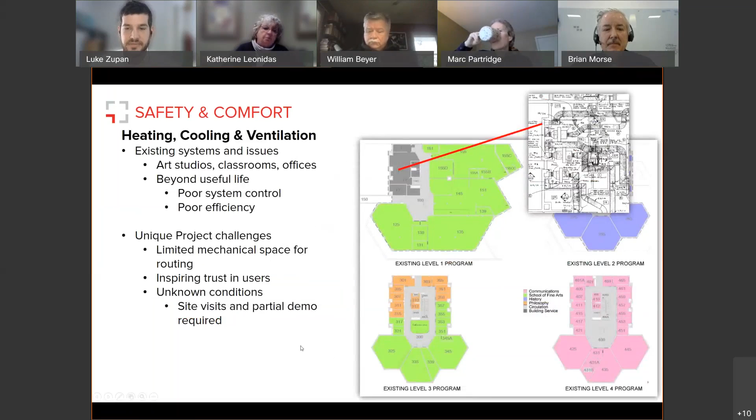What's really important in design, in my mind, is the approach. That being said, we have a pre-design and we've all had access to that. That's a snapshot in time. Many of those elements are very relevant and good ideas for this building.

That being said, there's no way we can do a complete design without the owner's input. So that'll be step one in our process: really understanding what the occupants' needs are, whether that be the art space or the classroom spaces. What's the experience of the UMD staff? The institutional knowledge we've gained from previous projects and previous work will be paramount.

Next, we have our CM at risk. We'll leverage that as a tool to really understand cost implications, constructability, means and methods, as well as market forces that we're all living through right now in the construction world.

I want to explain very briefly a couple of these images. We have a steam to hot water heat exchanger. This is something that will definitely be part of this project. We've just worked through the design of one of these with John Sawyer on campus, so we have that experience. It's in our back pocket.

Above that, we have a VAV system. This is a likely candidate for this project. It provides zone control, and access to the building automation system to create good sequencing and good efficiency. Alternatively, we have a chilled beam design here, which is just one tool we could look into to provide smaller duct chases. We look forward to exploring these options.

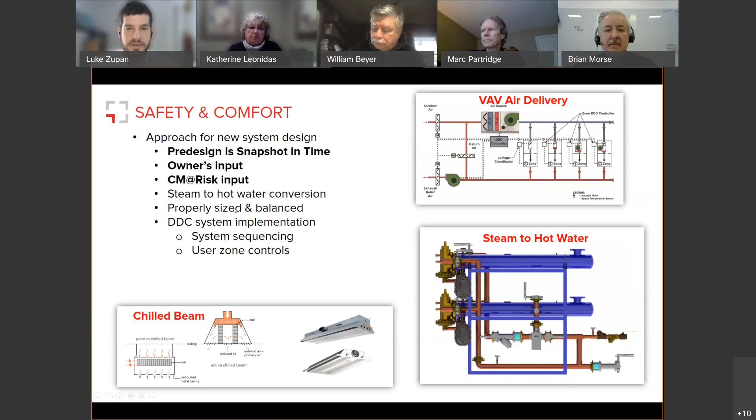I just have a couple of minutes. I wanted to point out this is really the extent of the fire protection in Anderson Hall. And obviously, at the end of our project, we'll use our specialist, Brian Kelly, to develop an active and passive system that is extensive to Anderson Hall.

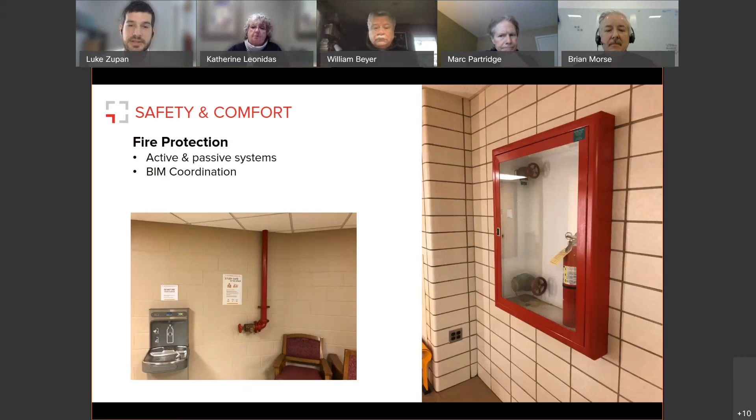And the way we can do this effectively is through BIM coordination, like all other elements, whether it's piping, ductwork, or fire protection, that's strictly coordinated through our building model to create something that's constructible and efficiently designed. Next slide, please.

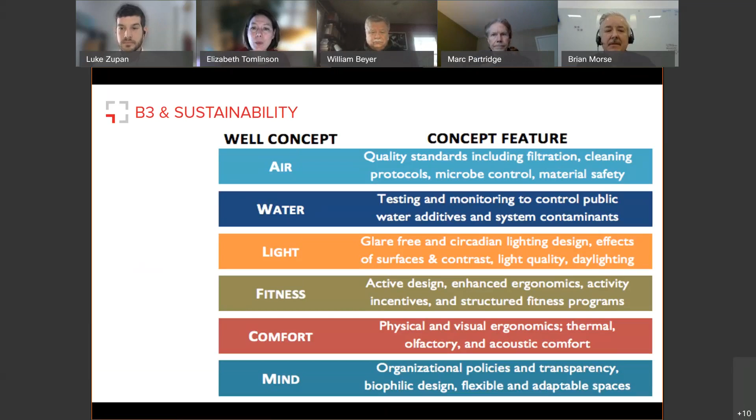Next slide. So I had presented in our proposal a preliminary assessment of what B3's SB 2030 expectations for this facility would be. Again, being grandfathered in for our pre-design start date, we will be expected to meet 40% better than a typical building, which is pretty great for this facility.

I know the windows have already been replaced, so that's a great step forward. But with the mechanical and electrical upgrades, we're going to be able to pick really efficient systems and hopefully get to this target of 83 EUI, the energy use intensity. If you're not familiar with that, it's like the miles per gallon of a car — a metric to compare buildings against each other over time or to other buildings.

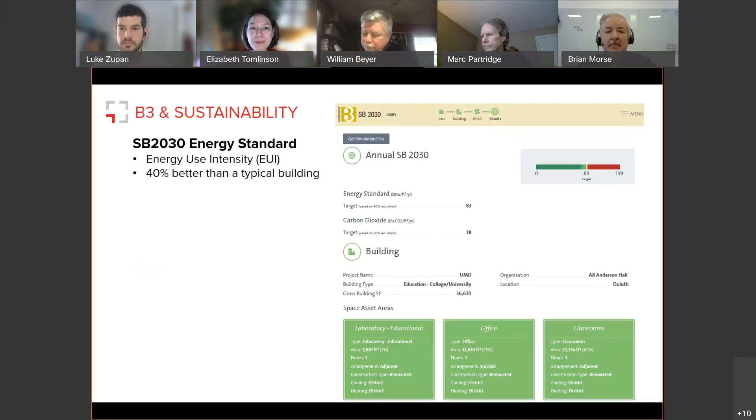Next slide please. So here's an example of what we tend to put together for our projects. Energy modeling, a whole energy model, is paramount for a project. You have components that you try to include within a sustainable project, and they counteract and work with each other. So creating whole building energy modeling incorporates all of the components, whether as an iterative process to assess individual alternatives for replacements of one system or one envelope component, or the whole package together.

This is the kind of output that will generate so the owner can have information to make an informed decision. Along with these presentations of the impact of choices, we provide life cycle cost assessments. That includes not just the short-term costs and energy impact, but also the long-term maintenance and long-term cost of replacement of equipment. So it really gives the owner a full understanding of the selections we're presenting and making informed decisions.

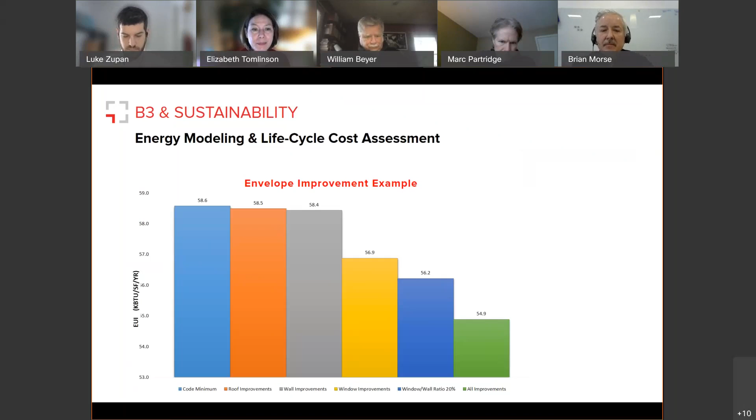Next slide. So here's an example of a tool that has been recommended — it's the talk of the town. It's an image of bipolar ionization. Basically, it's just one tool for air quality. You can provide a lot of different options that provide flexibility within an HVAC system.

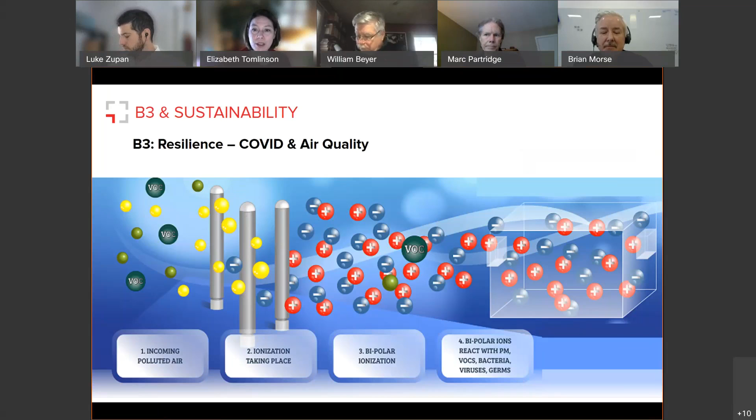I put this up here to just have a talking point on resilience. Resilience is just planning for adverse events, whether it's a pandemic, high allergy or pollen counts, or smoke. Really, resilience at TKDA means talking with the client about what risks they anticipate or could anticipate, and letting the engineers solve the issues. You're in good hands. I know this slide looks a little doom and gloom, but the gist is there are issues out there, and we want to help identify them ahead of time so we're making smart investments and your facility is flexible for whatever may come, so you're well prepared.

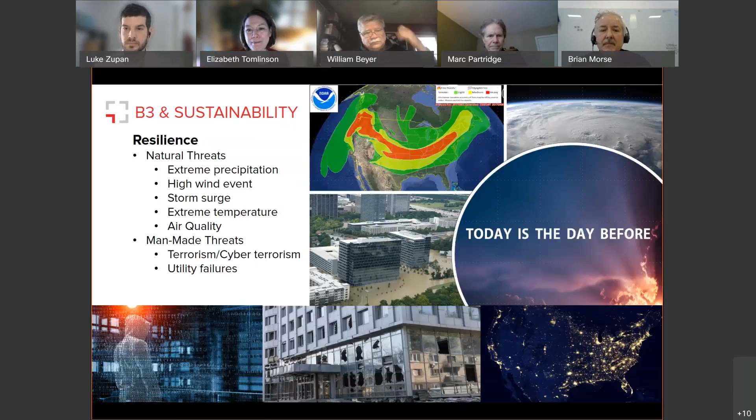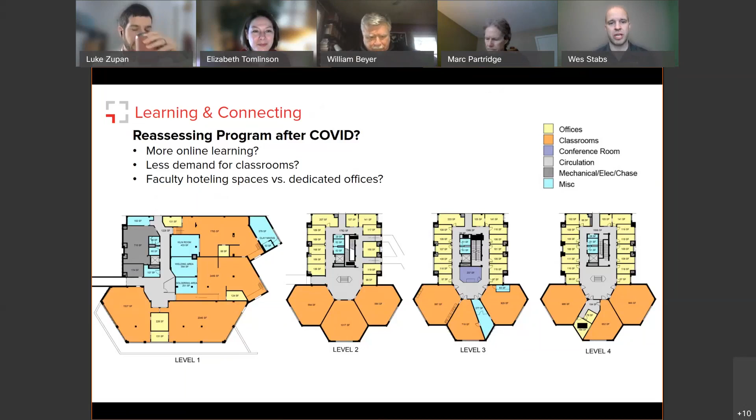University insights to these questions could equate to physical space that is freed up for other uses. I want to quickly take you through the architectural needs as outlined in the pre-design and university wishes.

We'll be supporting mechanical and electrical by developing a mechanical penthouse enclosure, rated mechanical shafts for ductwork that pokes through the floor, and architectural finishes to cover up the ductwork in the end. There's also accessibility issues that we have to think about as we go through the project.

And the university has stressed the idea of enhancing the building entrance. Currently there is not a clear entry facade, although there is an entry on level 2, but that is not in the budget currently, so it is something we'll have to look at and work with them.

Another thing we've identified is that the facility currently lacks adequate restroom space. There are 2 present on the first floor, but realistically the building should have 8 toilets per sex. Right now the restrooms are allowed to be shared with the Humanities Building, and in the past that was okay, but as we work with university code officials and the university, it'll be something we want to look at.

This diagram gives you an idea of the type of toilet room spaces we'd be looking at, and we would probably need about 150 to 175% of that area. So something would ultimately have to give program-wise.

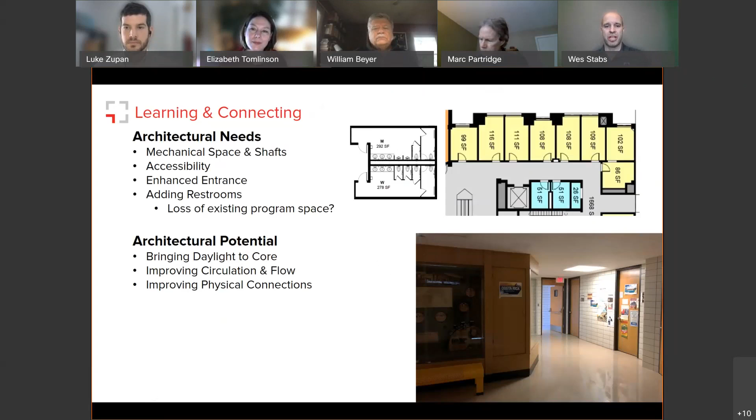But the project has a potential to provide more than that. We have the ability to strengthen student communities, and I want to take you through some of the architectural potentials we think we can bring into the project, including bringing daylight into the core space of the building, improving circulation and flow, and improving physical connection. Next slide, please.

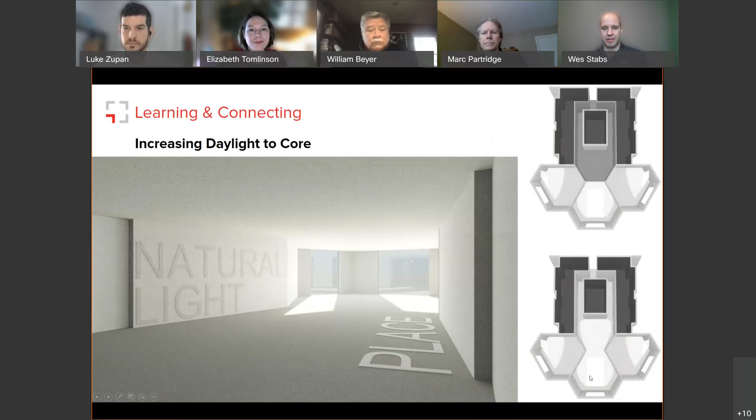Increasing daylight to the core by making simple, economical removals, we can get much needed natural light into that core space. Next slide, please.

Taking that idea a little further, if the program can give up a classroom, for instance, a student queuing space or sticky space can provide soft seating, reduce traffic congestion, and improve circulation and flow for the building floor.

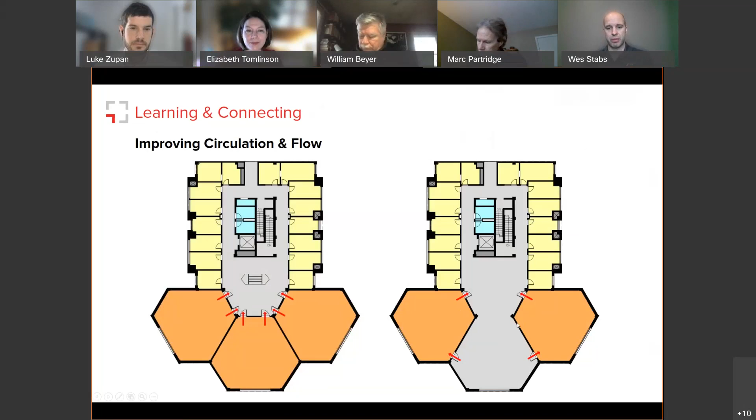Again, by removing a wall, this sticky space could also be an area where we could present student artwork on the wall from the fine arts program below. Next slide, please.

And then improving connection. The second floor of Kathryn A. Martin Library was closed off by book stacks, compartmentalized offices, and underutilized storage and IT spaces. In a project within the past 4 or 5 years, we were able to work with the university to remove these barriers and open up the space to allow transparency.

The new student-centric program reinforces gathering and collaboration, not so dissimilar from what A.B. Anderson's queuing space could become. Next slide, please. With that, I'm going to turn it back over to Brian.

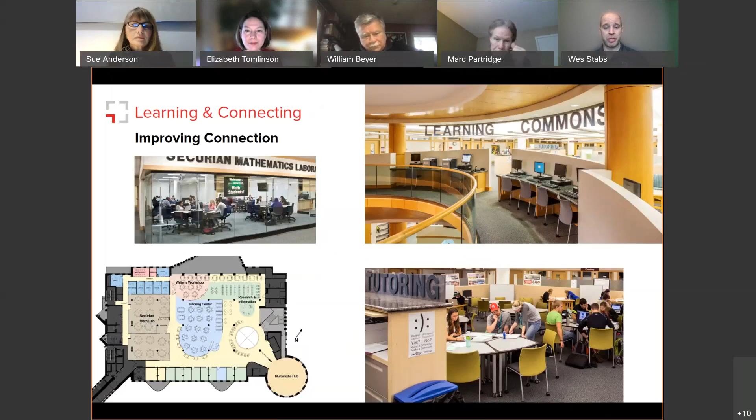Well, I would like to hit quickly on a couple of observations, and that is, the pre-design, as we've mentioned, really was a snapshot in time. There's the RFP scope, as we've heard, and there's some additional scope that was discussed during some walkthroughs. I guess the takeaway is it's going to be real important that we understand what the scope is as we leave schematic design.

There's the code required issues, and there's the wish list. I would put the generator onto the latter, and I'd like to talk about that a bit if anyone wants to ask me a question later.

I'm illustrating here the implication of taking a 5% escalation starting at the end of 2016, going to the midpoint of construction, and just illustrating that alone is $1 million.

We can talk a little bit about how much of that truly is escalation versus how much might be able to be in another pot called contingencies. But I'm well versed in those conversations, and welcome that discussion with the university and the construction manager.

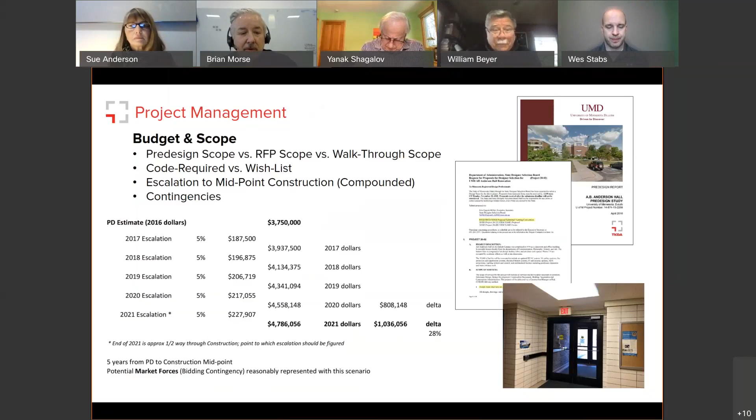Touching again on the construction manager, they're going to be a key partner in all of this. It's going to be very important, as I said, that as we leave schematic design, we also leave behind the study of all sorts of iterations. We need to not necessarily dash out of the gate, but at least start trotting out after schematic design towards the completion of the project. The construction manager is going to be a key partner in all of that with us.

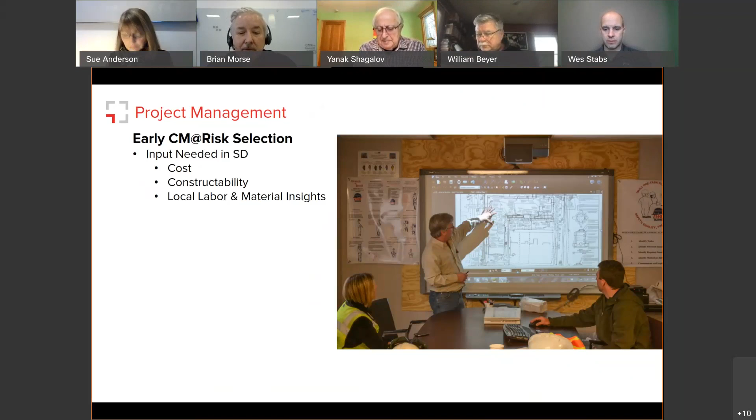And for us, the design starts as we start putting together the team. I really do think that we've designed the best team for this project. We have local professionals, very experienced in all the aspects that are needed for this project. We understand the campus and the challenges that are ahead of us.

I just want to hit home the idea that this is much more than a mechanical and electrical upgrade and code deficiency repairs. This really is an opportunity to create a safer, healthier, more efficient, and very importantly, more effective teaching and learning environment.

So with that, those are our high points. I hope maybe there's a couple of nuggets of information in there that will generate a couple of questions. And I guess I open it up to the board and the university to ask some questions.

Brian, I have a question. You talked about moving the emergency generator to the wish list. Is it now not part of the budget?

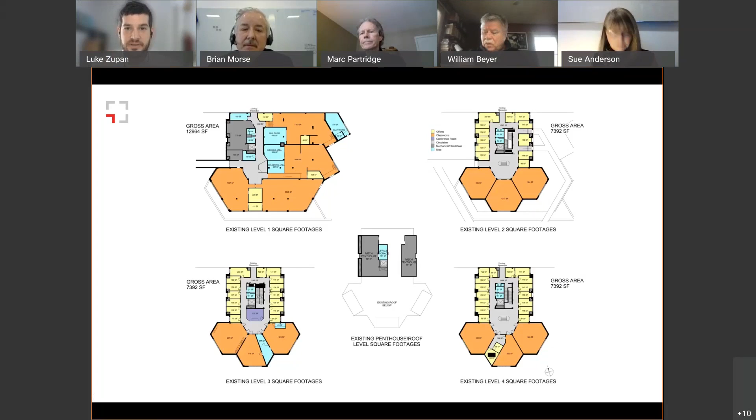The great thing about chilled beams is they induce airflow. So instead of bringing your full quantity of air to the space and back to the air handler and back to the space, you're able to induce some of that ventilation with just the technology in the chilled beam. So you're really left with providing the primary air or the outside air, which greatly reduces the amount of trunk ductwork. So it's efficient in that respect.

You do have some trade-offs with heating and cooling. One of the trade-offs is you perhaps have more piping, small bore piping, versus a VAV system. So these are some of the things that will weigh when it comes to actually laying out the infrastructure of the mechanical systems.

I would think that it's such a small, tight building that anything you can do to reduce your ductwork would be intriguing. But yeah, I was curious. That's exactly why we brought that up as an option, and there are a couple other technologies we could look into.

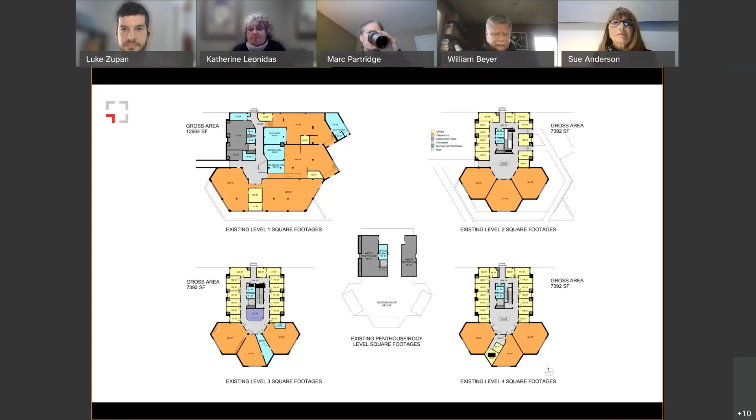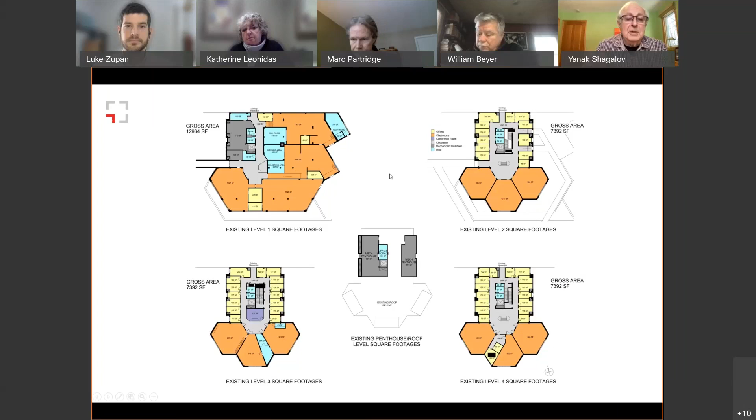Question from the board? Yeah, I have a question. Extending the penthouse will create a drifting snow problem on an existing roof, and I wonder what kind of extent of the problem and cost implication if we need to reinforce the existing roof. Also, the building was designed in 1970 with a complicated roof configuration, and I'm not sure if it was designed for drifted snow at that time. So the whole roof structure needs to be checked.

Sure, and I'm an architect — we didn't bring our structural engineer to the discussion here, but I am informed enough to be even more than dangerous.

A couple of key takeaways: where the current penthouse is, that building was provisioned for multiple stories of addition. It was designed to be expanded. Now, you're absolutely right that at the time this building was built, there was no requirement for considering snow drifting. So whether or not the code official will require that is something we'll have to discuss, but there is a certain amount of existing snow drifting that does occur on the building.

As we look at this diagram, where you see the placeholder — just for budget purposes and pre-design scope definition, we show an expanded penthouse. We've been rethinking that internally, that maybe what we do is make these two separate penthouses that are there now into a contiguous penthouse.

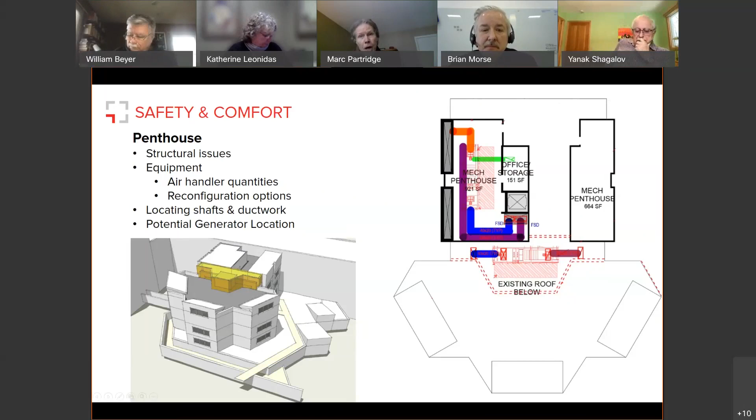Yeah Brian, I had a question about the electrical team, I think we touched on it in the shortlisting as well, looking at your placemat. I can't quite remember, but I believe you've got a split team of TKDA and... is Ryan with Hallberg? Okay exactly. So my question is, for a pretty small project, maybe explain or expound on that split and the efficiencies of it.

Yep, and I apologize my attempt to explain that didn't come across yet. As we're putting together this team, one of the pass-fail requirements is that there's a certain percentage in the targeted business group. Nobody really wants to join a team strictly because they fit into that category, they want to be on the team because they're adding value beyond being qualified. I present Ryan as the most qualified person to understand the existing power side of AB Anderson Hall, because he was the engineer of record when the 13.8 primary service and the 208 power to the building was split off from Cina Hall, so he did that original work.

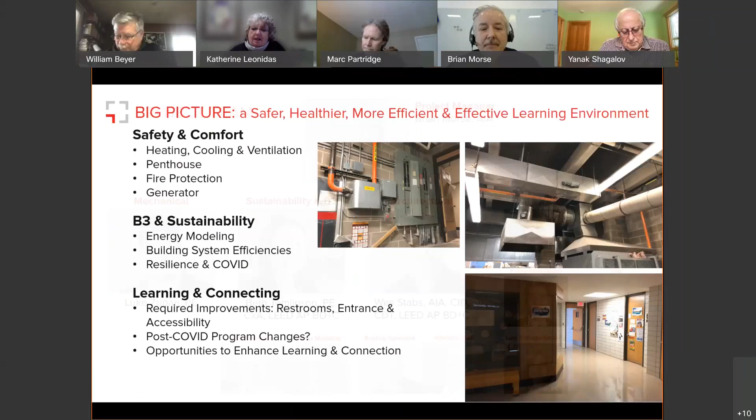Well, with 3.2, if we had not been grandfathered in, I'll call it, then we would have been expected to comply with the complete energy efficiency as if this major renovation were a new construction project. That in itself would have been very challenging for this project. It would have taken a lot to completely retrofit the envelope and replace the entire roof. It's a lot of work to get to where B3 wants for the SB 2030 component of energy efficiency within B3.

Other components include ensuring you have renewable energy, ensuring you're absorbing most of the rainwater that falls on the site and perhaps reusing it. That's more stringent with the water efficiency requirements if we do move forward with restroom design. There's just a lot of implications that are more stringent in 3.2. So getting into 3.0 for this major renovation allows us to invest the money where it makes sense, not just to check off boxes that the state requires, but to make sure the owner, the client, is truly getting the best bang for the buck for their investment in mechanical systems, lighting systems, or even material upgrades for the classrooms.